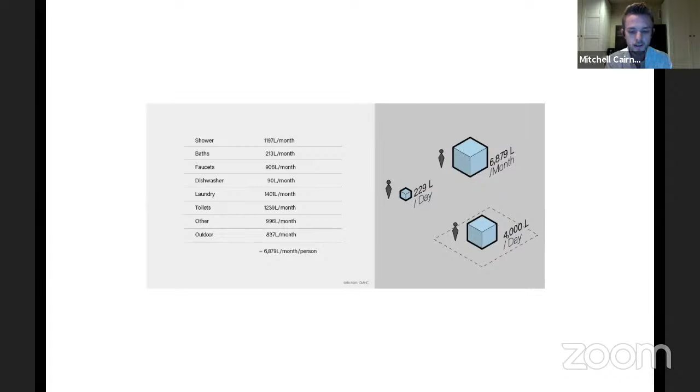Human demand of this resource, even in water-rich North America, can leave whole ecosystems with insufficient water, devastating plant and animal life. With all of this, and water's unique tangibility and tactility in comparison to electricity, it will be the resource of focus for this thesis moving forward. According to the CMHC, on average an individual Canadian consumes 6,879 liters of water per month.

If the building were to collect and provide its own water instead of relying on municipal water, it would greatly lessen the environmental impact of the water consumption.

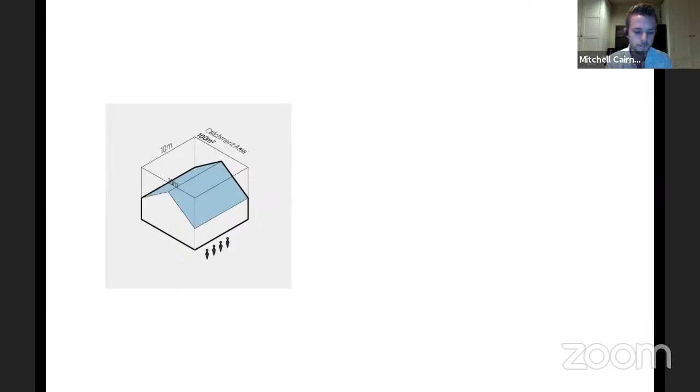How much water can realistically be collected by a home, though? This diagram depicts a typical size suburban home with a building footprint of 100 square meters. The charts on the right indicate how much water is collected by a roof of this size each month relative to the amount of water used by various fixtures. As you can see, the collected water is only enough for a single fixture each month, with some water left over in months of heavy rainfall.

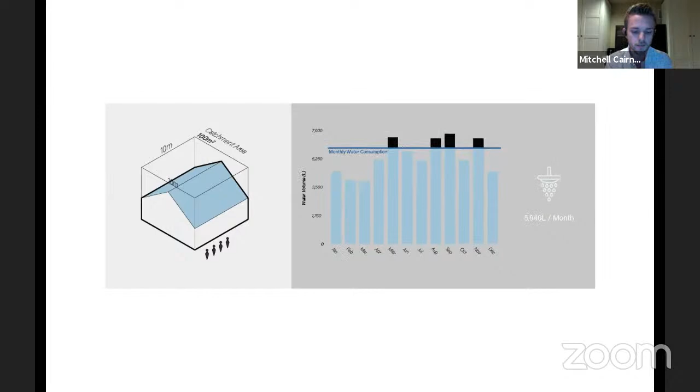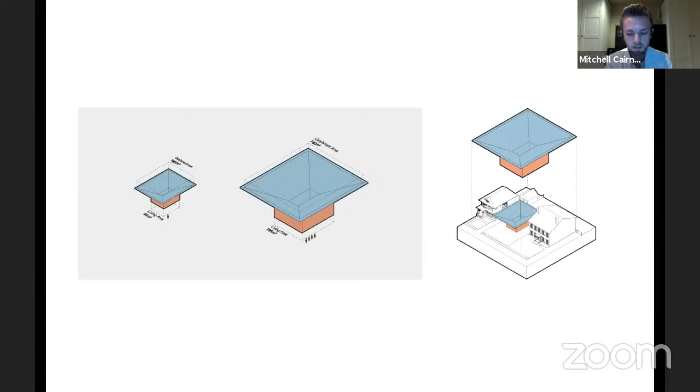This brings up the question of reasonable consumption. Instead of accommodating current consumption habits, are these habits even reasonable, and is it feasible for people to consume less water? Now that the problem has been defined, before attempting to answer that question, let's look at how buildings currently deal with issues of sustainability.

In my thesis, I've defined two main existing approaches to sustainable design. The first I call performance sustainability, which is a building that uses minimal resources through technological intervention. In terms of sustainable design, these types of buildings are generally unremarkable as their sustainable functionality is performed by systems often hidden from view or entirely disconnected from the overall design.

Design sustainability, on the other hand, is a building that embeds sustainable ideologies into its architectural design process. These buildings are more overt in their sustainability since this would have been a goal from the outset of the design process.

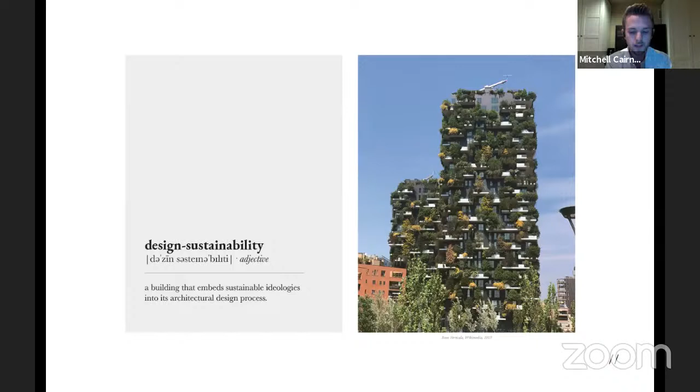Part 2, Sustainability in Humans. While passive design strategies and high-efficiency HVAC systems are effective strategies of reducing the environmental impact of buildings, the humans occupying those buildings often don't understand or care about these systems, and therefore don't understand or care about their role in contributing to the building's overall sustainability.

How then can architecture take the concept of sustainability, which often resides in a more technical realm, and bring it to the forefront of people's awareness?

Sustainable design PhD student Debra Lilley examined various methods that innovative products use to shape human behavior towards sustainable outcomes through their design. She created a simple framework which places products on a scale where one end is more passive and guides change, while the other is more aggressive and forces or ensures change. Her paper explored three concepts.

The first, called feedback, found in industrial design products such as the power aware cord, which visualizes energy consumption. The second, called behavior steering, is evidenced through the flower lamp, which provides incentive to use less energy and closes as more energy is used throughout the day. And finally is technological intervention, exemplified by the integrated sink plus toilet, which acts on the user's behalf regardless of their desire.

Using a washroom as a means to explore these ideas in a more architectural context, I developed a series of vignettes which attempt to consider how behavior might be shaped in this space towards the outcome of reduced water consumption. Through various modifications of this simple space, such as rendering it both physically and visually uncomfortable, visualizing wastewater, and requiring the occupant to pump their own water, it became clear that adapting Lilley's work to an architectural context was not enough on its own.

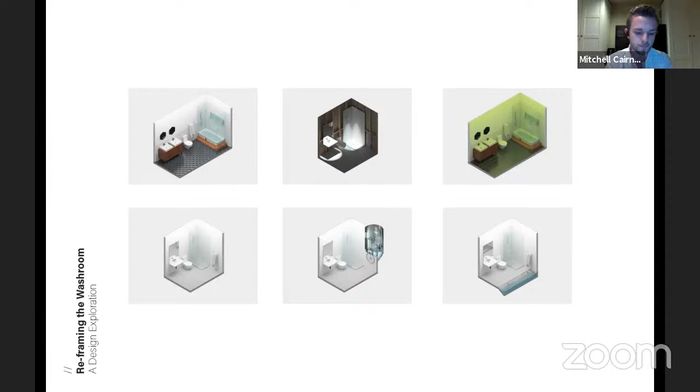Where the previous approach began from a psychology perspective, a second stage of design research explored existing architectural theory and considered how it might be applied in the context of this thesis.

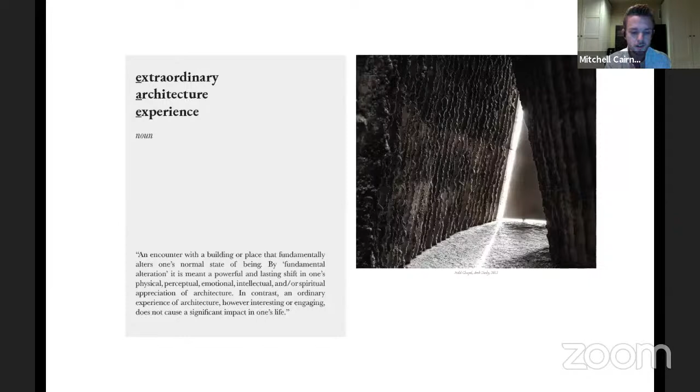In his book, Architecture, Culture, and Spirituality, Julio Bermudez presents the term extraordinary architecture experience, which is an encounter with a building or place that fundamentally alters one's normal state of being. By fundamental alteration, it is meant a powerful and lasting shift in one's physical, perceptual, emotional, intellectual, and/or spiritual appreciation of architecture. This text inspired a pavilion design which engages people in the most common

aspects of household water consumption, though it does so in very unconventional ways.

The anti-program of the pavilion allowed the design to explore beyond the confines of realism, pushing humans to an uncomfortable extreme. The main problem that the pavilion encounters is that one person would likely have a different experience and response to the building than another.

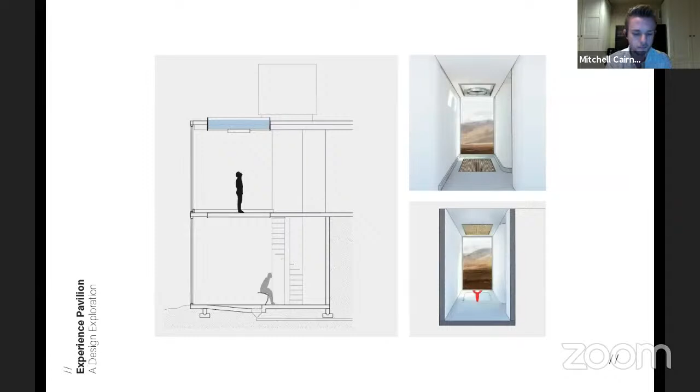Though the pavilion did not result in useful design elements, it ultimately points towards the variety of reactions individuals have towards architecture, and how this positions Bermudez's work as an interesting way of measuring experience, but not a tool for creating it. Part 3: Sustainability and Aesthetics.

I'll let this quote by Frank Lloyd Wright preface this part of the presentation: 'Even these buildings we live in, or for, are no longer thought-built. In fact, they never were. They were merely taste-built.' Aesthetics can be defined as a set of principles underlying and guiding the work of a particular artist or artistic movement.

Consider guides for design such as the Golden Ratio or even Corbusier's Modulor Man. These guides are used to arrive at a formally aesthetic, pleasing design outcome. This is obviously a very valid approach to design and plays a significant role in the architectural discourse.

However, it is a dangerous temptation in the context of sustainable design. Over the course of several design projects, I struggled to escape the process of designing from this perspective. It is important to briefly reflect on some of the work to understand the need to detach from such an approach to design.

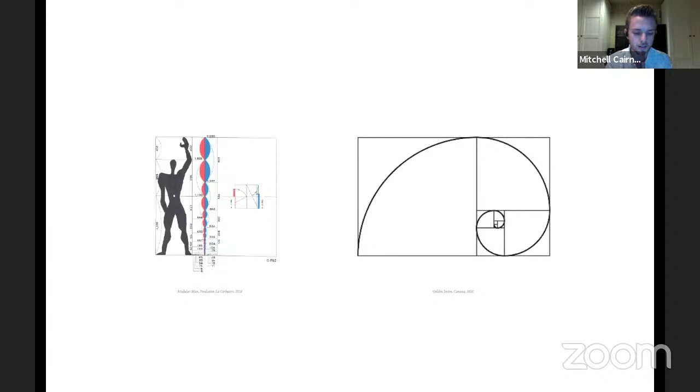The premise of the design for a consumption feedback neighborhood was to integrate publicly exposed water collection tanks into a home's design in an effort to reduce water consumption. The problem was baked into the project from the outset, as the driver for each design was not the water itself, but rather some external arbitrary aesthetic goal.

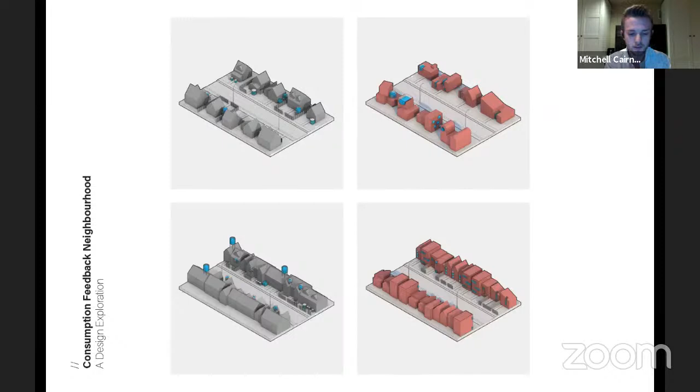In retrospect, these houses were designed with an aesthetic outcome determined prior to the design process. This is not to say every aspect of this project was flawed—many of the ideas developed in these houses persist into the latest design work. However, the most important lesson learned was how to escape the temptation of designing using aesthetics as the driver.

Aesthetics as an outcome. The conclusion that can be drawn from the previous design explorations, and much of the existing catalog of sustainable architecture, is that to arrive at the stated goals of this thesis, aesthetics should not be a starting point. Instead, it should be seen as an outcome of a sustainable design process that forgoes formal aesthetic considerations to the greatest extent possible.

In the book Aesthetics of Sustainable Architecture, author Glenn Hill describes a term called moral aesthetics, which defines a process of design whereby formal outcomes are dictated by sustainable considerations rather than aesthetic goals or principles.

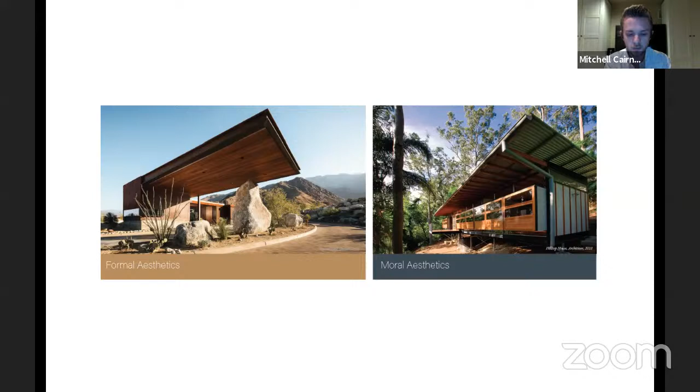For example, both of these buildings feature an overhang. However, the left overhang was designed with a desired formal outcome in mind, whereas the right overhang exists to provide a greater surface area for rainwater collection and to reduce solar gains within the building. The driver for this overhang is not a desired formal aesthetic, but rather considerations for a more sustainable building.

So far, this thesis has identified the problem related to sustainable design and water to be that humans generally consume too much of it within their home, and the architecture does nothing to guide or improve this behavior. It simply manages and mitigates.

A second problem is that the design of buildings themselves doesn't convey the importance of caring for water. In fact, they can convey the opposite—buildings are designed to have an exclusionary attitude towards water. Water in the context of humans generally relates to consumption, drinking, bathing, cooking, but buildings play a much more significant role when it comes to water.

They keep people dry. At its absolute bare state, a building is simply a shelter—walls and a roof to keep water out, among other things. But in doing so, it paints water in a negative light, a thing to be avoided.

To begin to address these issues through an architectural project, it was important to take a step back and approach the design process from the standpoint of water, and how not only the occupant, but also the building, are to engage with it.

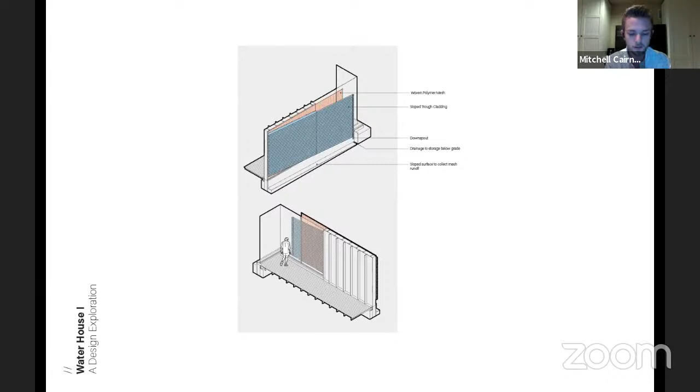The key element of this design is a central large 7,800-liter tank that stores the monthly amount of water a family of four can consume under the ideal water consumption model. The placement of this tank is meant to act as a clear and constant reminder of the occupant's consumption habits.

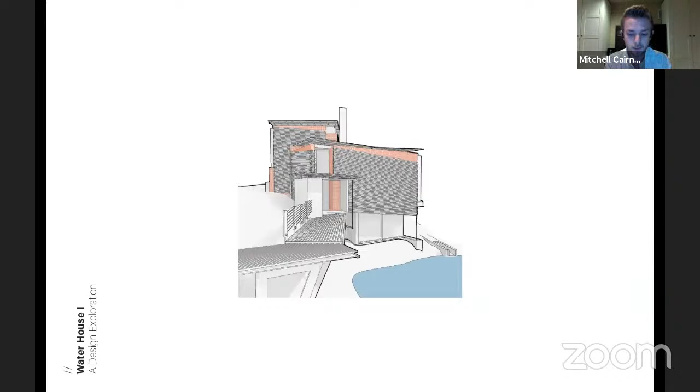These various design strategies draw from much of the previous research and begin to demonstrate how a building can engage with water from a new perspective, as well as how the concept of consumption feedback can manifest in an architectural project. Though this project does not describe a new model for sustainable design, it provides a starting point for new avenues of conceptualizing aspects of design and highlights the areas that need greater focus moving forward.

That brings us to the final design project. Moving on and learning from the previous residential exploration, this final design project was approached from a similar but more rigorous perspective. The previous design was located on a large site, which allowed for unlimited design exploration, whereas this project is located on a much more restrictive site. The smaller site changes the building's relationship with sustainability and water.

With the previous design, the building was sized based on the consumption model for a set number of individuals. The site itself had very little bearing on how much water could be consumed, as it was so large. In the case of a smaller site, it plays a much larger role in what is considered to be a sustainable amount of water, as less surface area means less space for the various components of the water management system.

Therefore, maximizing the extent of the site allows for a building that has a more concrete and clear relationship with sustainability. In other words, the previous design had an arbitrarily human-driven relationship with sustainability. This project has a site-driven relationship with it.

Municipal water infrastructure serves the site. However, unlike the neighboring houses, this lot will not be connected to those services, as it will be a self-contained water system, performing all of the tasks from water collection to treatment on site.

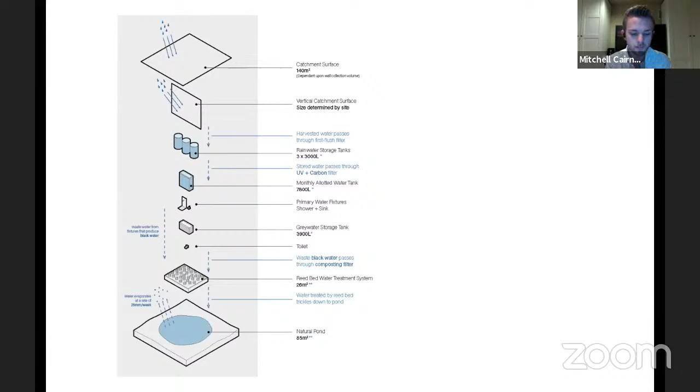As mentioned previously, vertical surfaces can collect water as well. This is due to wind-driven rain, which is quite common during rainstorms. The amount of water deposited depends greatly on the wall's orientation. The driving rain rose indicates the amount of water per year that will be deposited onto a building face.

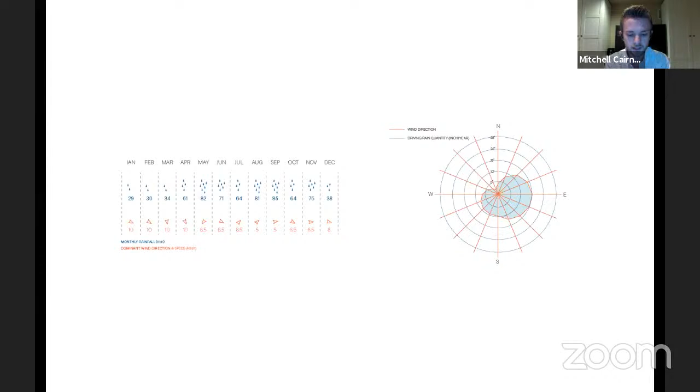This number is affected by several factors, such as surrounding urban density and wall height. Based on the orientation of the site, these diagrams illustrate the amount of water that will be deposited onto each wall. The leftmost diagram uses a wall that's orthogonal to the site, like any typical suburban house. Based on the site orientation, a fair amount of water will be deposited onto this wall. However, it can be further optimized.

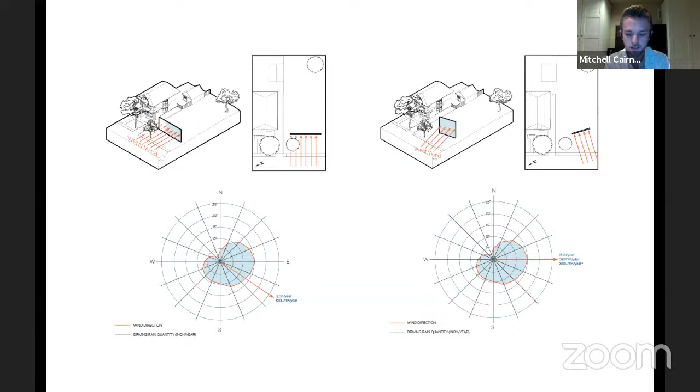The wall on the right faces due west to maximize wind-driven rain exposure. It also accounts for a tree at the front of the lot by becoming more narrow, but extending upwards, which allows it to take advantage of more wind exposure at greater heights.

Another iteration of the wall that was considered was a curved wall. Typically, concave surfaces introduce erratic wind patterns, which may or may not affect the amount of water impacting the wall surface. The equations used to calculate the wind-driven rain load on the previous walls cannot be used for curved walls, and as such, it will not be used moving forward.

With the wall's position defined, it can be used as a starting point to generate a building massing. The other constraint on the building massing is the catchment area. Earlier in this chapter, it was concluded that at least 140 square meters of catchment area will be required to accommodate the water consumption model.

Though, since sustainability in the context of this project is tied to the site, this number acts as a minimum rather than a limit. This diagram represents the massing process, which aimed to achieve a mass that accommodates both a minimum catchment surface as well as enough volume to provide a comfortable and expected living experience for a typical Toronto family.

The roof is perhaps the element most synonymous with water protection. In the case of a house which operates on collected rainwater, however, it serves a far more important purpose than shelter. Rainfall data provides a quantity of rain passing through a horizontal plane.

As already discussed, rain does not always fall in a perfect vertical line, as wind often adds a horizontal vector, causing it to fall at an incline. Abstractly, more rain will impact a surface incline towards the windward side, which matches the inclination of the falling rain. Yet the additional amount of rain may only be marginal, but it's worth addressing on principle alone.

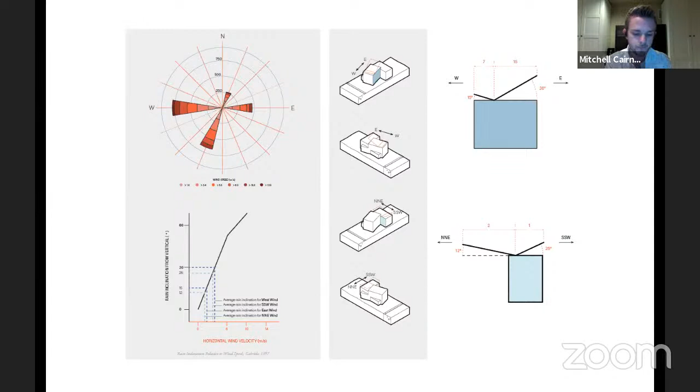On the left are various stages of massing development, which resulted in a sawtooth-style roof design. This is to reduce the overall height of the roof while maintaining the perpendicular angle towards the wind-driven rain.

The selected building massing employs a simple flat roof assembly and affixes the angled catchment surfaces atop a properly enclosed roof system. This is preferable to the alternative of allowing the roof system to follow the sawtooth catchment angles. Overly complex roof geometry is more difficult to construct and therefore more likely to fail.

A typical rain screen assembly is designed to engage with water, however, this engagement is defensive in nature. Instead, the profile of the cladding has been changed to resemble a gutter, providing a volume for water to collect and be transported into the home rather than away.

A simple extruded rectangular profile is insufficient for this task, as it would deflect a significant portion of wind-driven rain, and so a more effective profile was designed. The main component of this profile is the angled face, which matches the most frequent incline of west wind-driven rain, maximizing the exposure of the vertical plane compared to the rectangular profile.

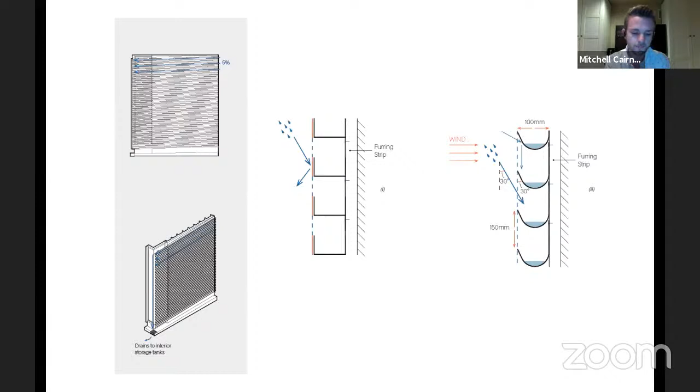Beyond the building itself, the site plays an important role in this design project. It is used to perform two necessary functions of completing the full cycle of water use: treatment and restitution.

Following the use of water in a toilet or other fixture that produces black water, the waste travels into a composting filter before entering the reed bed. Here, the water is passed through several gravel and plant roots, which cause a variety of physical, chemical, and biological interactions before it eventually exits the bed and travels into the evaporation pond.

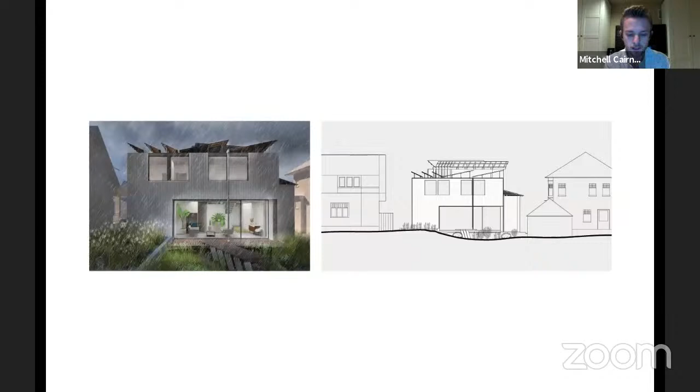Outside of direct human engagement, the site also has its own relationship with water. Typical grass lawns are not efficient at dealing with heavy rain loads, leading to significant runoff into municipal stormwater systems. To mitigate this, the site implements a rain garden, which is a depression into the site that's filled with various vegetation. The rain garden traps excess rainwater and slowly drains it back into the water table.

With all of this previous work, it's important not to lose sight of the actual use of water within the home, related to humans. Where the previous designs only employed one tank, this one uses two, one for freshwater and one for gray water. The relationship between these tanks and the fixtures that use them is important to clarifying the stages of exergy or water quality. Water that can do the most work is in the main tank, and gray water, which can only do low quality work, is in the adjacent tank.

This is further expressed by exposing the water traveling from the shower and sink into the gray water tank, clarifying this relationship. Two possible orientations for these tanks were explored. One was placing them vertically and the other horizontal. The issue with vertical placement is that it likewise suggests vertical placement of fixtures. It would be unreasonable to suggest that the occupant use the toilet on one level and have to walk up to the next to wash their hands. This leads to a horizontal placement, which allows for all of a washroom's fixtures to be situated on a single level, as well as allowing for multiple washrooms across both levels.

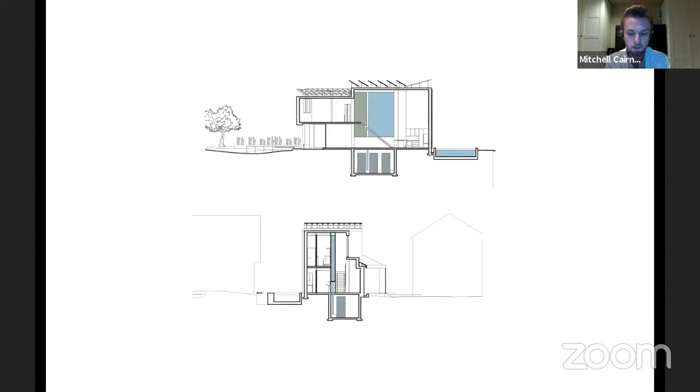To conclude, the primary question this thesis aimed to address was, how can architecture take the concept of sustainability, which often resides in a more technical realm, and bring it to the forefront of people's awareness? Approaching a sustainable building project from a typical architectural design perspective most often results in a disconnect between the sustainable design thinking and experience of the occupant. The alternative sustainable design process presented in this thesis steps outside of the conventional green design paradigm and begins to reframe the way architecture engages with surrounding natural systems, and likewise begins to reframe its occupants' understanding of the resources they interact with every day.

Most importantly, this thesis identified that while many of the innovations and advancements within sustainable design are greatly contributing to a better future, they're not the only tools to address environmental concerns. Through careful and thoughtful design, architecture can step beyond its current role and begin to provide humans with the understanding required to make meaningful changes to their relationship with resources. Thank you.

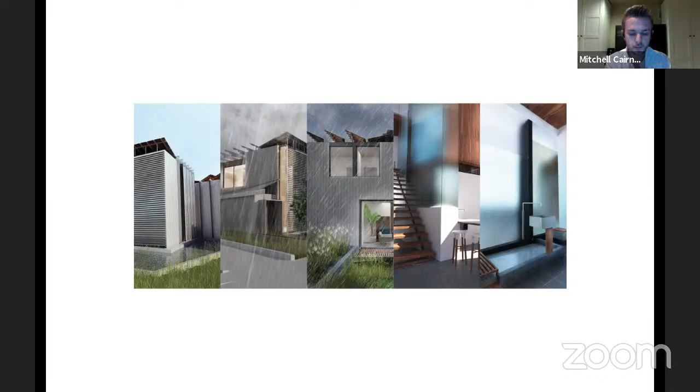Thank you, Mitchell. Paul, Vincent, the floor is yours, if you have any questions for Mitch regarding clarification of anything that he has presented.

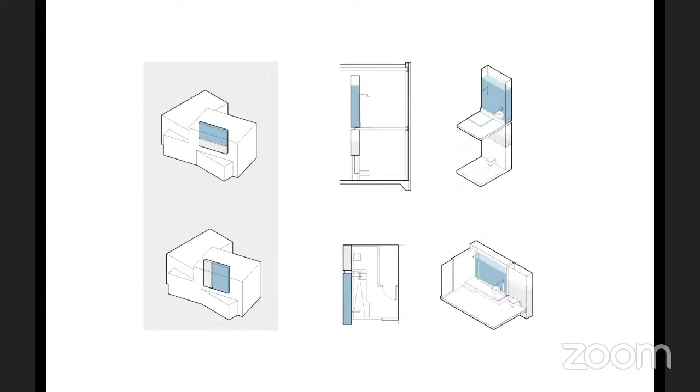I have one question. Did you make it? Did you generate enough water? Oh, in terms of the catchment area and the size of the house? Capture enough water, I should say. Yeah, sorry, perhaps I didn't clarify that enough. So originally, the first attempt at designing a house, which is this one here, that's when I generated this consumption model. So this on the left here, I don't know if you can see my cursor, but this is that model.

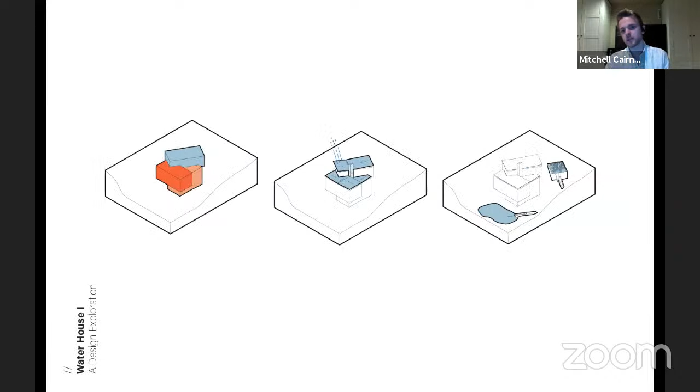So basically, yeah, you can collect enough for someone to use and live somewhat comfortably. Obviously, there's a lot of changes you'd have to make in terms of how much water you use. You'd have to be a lot more cognizant of it. But it is entirely possible to have an average sized house using that catchment surface to collect that water. So to answer your question, yes.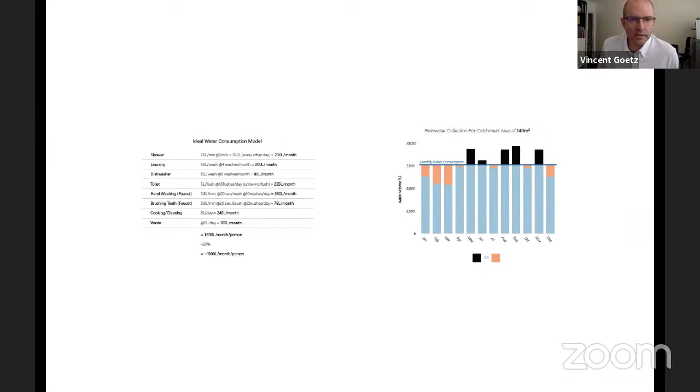I have a few more questions. Should I just start in on that? Or? Sure, Vincent, yeah. These are questions, of course, for clarification. Okay. Well, I think I'll just leave it at that then, and let Paul just ask questions about clarification, and then we can go into discussion after. Is that? That's the idea. Yes. Okay. Thanks, Vince.

Thanks, Mitchell. I actually don't really have any questions for clarifications. I thought that your framing of the solution was quite methodical and thorough. So I don't need any clarifications, but I do have a number of comments, but we'll wait for those. I think we can potentially go ahead with the comments unless Miliana, Mark, do you have any questions before we ask our guests to provide feedback and commentary? No, I'm good, thank you. We've been following Mitchell's work for the past year, so it's pretty clear to me. So yeah, we can start with the discussion. Yeah, me too. I'm happy to go ahead. Okay, so Paul, please take it away.

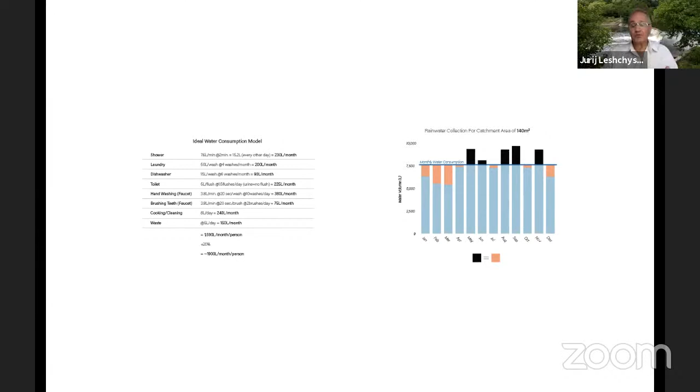Okay, terrific. Thanks, Jurij. So Mitchell, as I said, I think that your framing of the solution was a very good step-by-step development through it. I got what the solution was all about.

However, this is where the big however comes in. The feeling that I was left with when I got to the thesis was that your thesis was a solution searching for a problem. And I'll unpack that a bit for you because it sounds very blunt and direct.

So one of the overriding current concepts of sustainability in the realm of architecture: how can architects help to drive people towards sustainability? One of the biggest things that we can do is reduce the consumption of cubic meters of built space per person, just the cubic meterage that each person occupies.

And at the beginning of our discussion today, we were talking about the fact that I pay very expensive rent for an office that nobody has used since March, and nobody seems to want to use it either. So there's a consumption of cubic meters that we use that maybe we don't need to, and we can be more sustainable. So I got the sense that your project was certainly not in any way looking at the reduction of the cubic meters per person in your house.

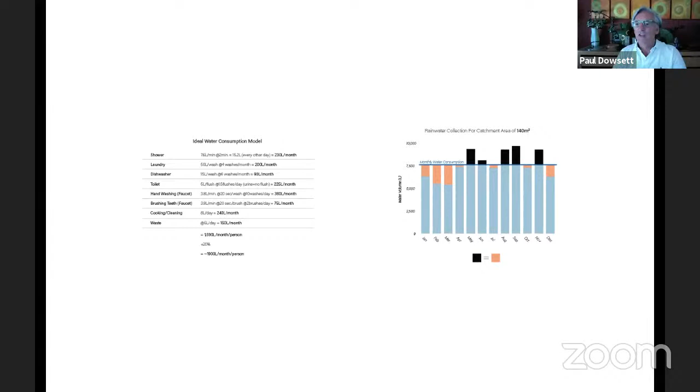The second question is, if what you've created is not an ideal solution for the City of Toronto, because we have such a robust, mostly natural system available to us, where would this solution be a solution for? Where in the world? And would they have necessarily the same rain and wind principles? What might you need to modify to apply this solution in a location in the world for which it would be appropriate? So, two very long-winded questions. Sorry, Mitchell.

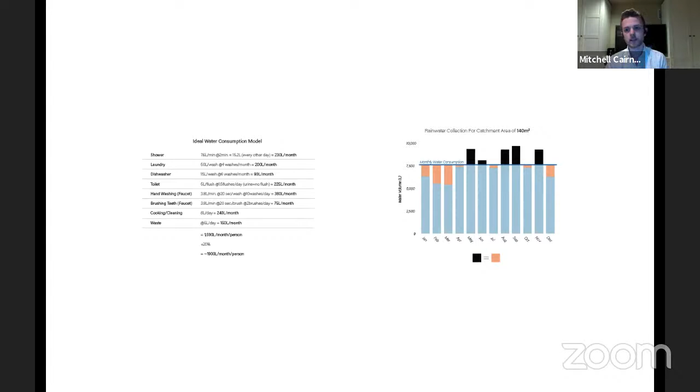Okay, well, great. Thanks for the questions. So to answer your first one, I guess I kind of have a two-part answer. If you want to accept that obviously our water system here is great, as you mentioned, and you don't want to consider using site-collected rainwater, which I'll get to in a second, you could completely forego that, I suppose, and use the internal feedback system of these exposed water tanks in a similar fashion.

I actually did have some earlier projects that I haven't included here, but I did exactly that. Rainwater came in halfway through my thesis, and I was using municipal water and just looking at the human element operating inside of the building. But I'll explain why I went so far as to completely cut out the municipal water connection. And the point for that was really just to push the concept of using architecture as a design medium to frame the importance of this particular resource.

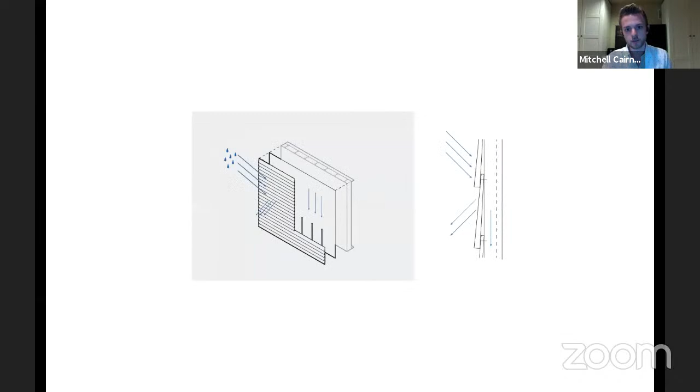So I think if I go to this little sketch I did ages ago, and maybe imagine this in a larger context where you don't see the treatment happening at the plant. You don't see the treatment. You don't see all of these larger processes.

And I think if that's located, if that's yours and you own it and you have to care for it, it becomes something that you care about more. So I think in that way, aside from the sustainable considerations, just in terms of how it changes people's perception of resources and how they care about those resources, that's sort of the motivation for designing it the way I did. And to answer your second question,

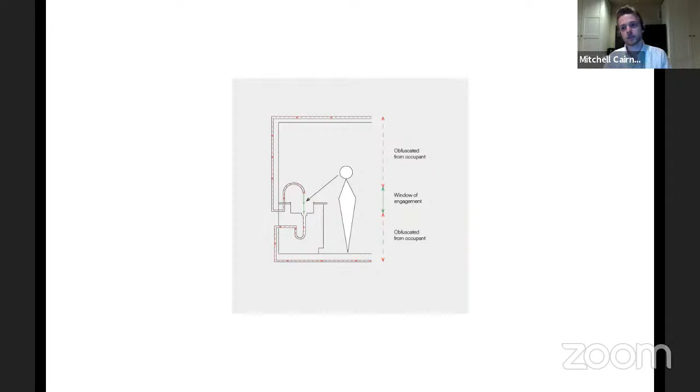I established early on that I was going to focus primarily on Toronto and our region here, just because when you're dealing with things like meteorological data and these sorts of things, it's very difficult to create a universal design. And actually, I'd say that the final design outcome I have is certainly not universal, even relative to its neighbors. Like if you were to build this across the street, it would look entirely different.

If you look at the rain data, obviously this catchment wall would be located at the back of your property if you're across the street, right? Certain things like that, the entire design would look different. So I think you could probably take the concepts and adapt them to another site elsewhere in the world, but I think the principles would apply, but obviously the design outcomes would be entirely different.

I'm not familiar enough with certain climates. Like obviously in a drier climate, that wouldn't work at all. You could certainly use the feedback systems that I developed for the interior and trying to express the water quality and the difference between freshwater and gray water and appreciating it and that sort of thing.

So I think ultimately this isn't a model that you replicate. Like I said, even in the same neighborhood, you wouldn't replicate this everywhere. It's just the approach to the design that I intended to be something that could be used elsewhere. I hope that answers your questions.

Mm-hmm. Yep. Thanks, Mitchell.

Vincent? I'm interested as to why you chose a house as the model and not, say, for example, a suburban industrial building that has a huge roof and potentially lower demand, and doesn't have easy access to the infrastructure that you have in an urban setting.

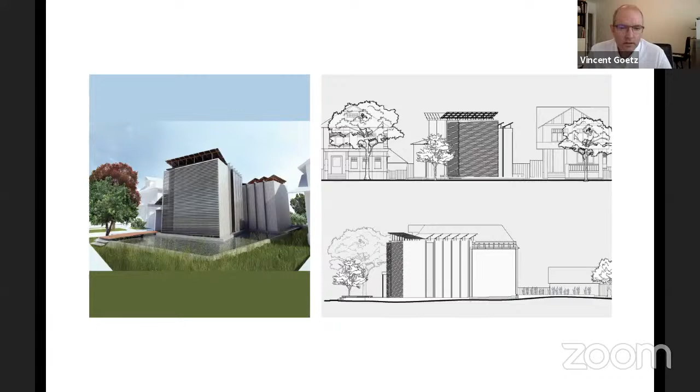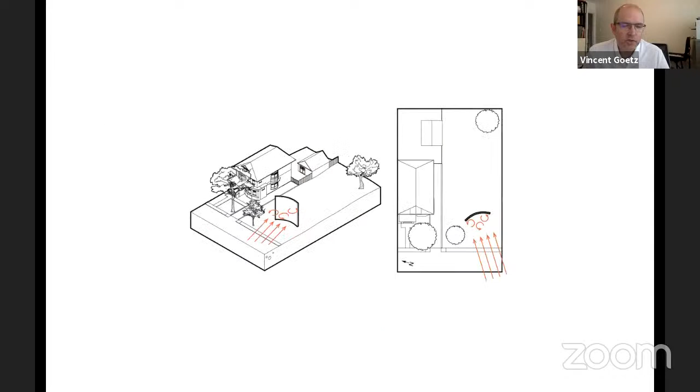The collection system for the roof, you had an interesting diagram where you had sort of a sawtooth structure versus the clip-on catchment. Yes. I was intrigued by the sawtooth and thought that maybe moves such as that could be seen as integral to the building. It could even be almost a structural solution to the building. It could also be the daylighting solution. It could be a whole number of things. So I'm interested as to why you went that route.

And by going the route of the sort of clip-on, could you have maybe made more out of that? Could it have been PV panels that are also generating electricity, but also catching the water, but also providing shading, but also,

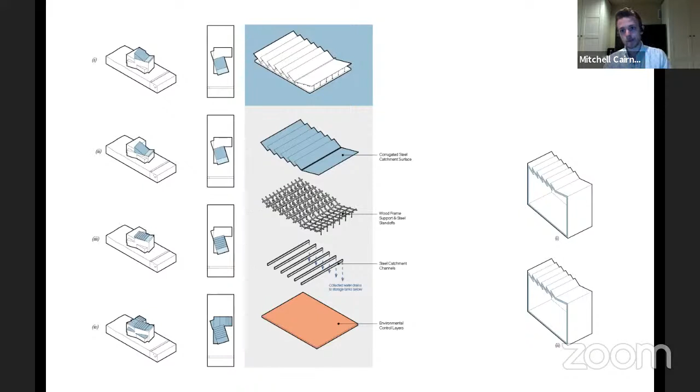And then just one last comment here: you mentioned that this is a solution for this site only, and across the street it would be different. But the slide you have up right now is almost like a kit of parts that could be applied to a variety of types of buildings.

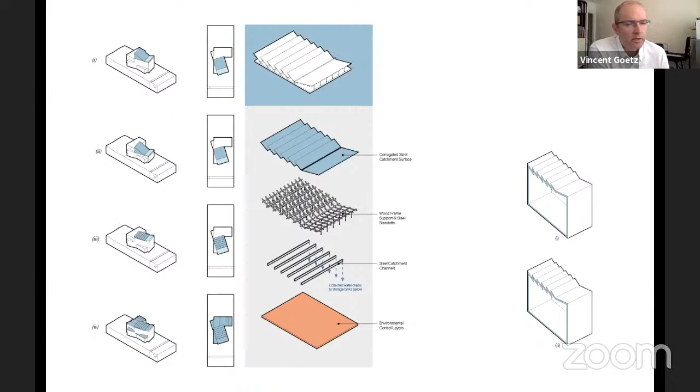So in some ways it is, sure, it could be a solution. You invented a cladding system to catch water, and you've got the roof system. But the plans of the house, I mean, you could lay out however you want, really. The pieces here are really the roof, the cladding, and the visible storage, right?

Yes. So in general, the layout doesn't really matter. You could quite simply not even have the bedrooms or the kitchen or dining room, and it could just be a space that you populate however you wish, and scale it up or down however you wish.

Yeah, so there's two parts to that, I'll try to answer both. The first thing is, when I said it's not a solution for all sites, I just meant that the formal outcome of this particular building—you can take the rule book I created to design this and apply it to any other house in this neighborhood—I just meant that the actual outcome wouldn't look similar to this in terms of the formal design.

But yes, I totally agree about the auxiliary spaces like the bedrooms and living room. I addressed this in my thesis but didn't have time to include it in the presentation. That's the one area where you need to make a concession in terms of formal aesthetic design, because a living room can't really be driven by water as a resource—it's not a space you engage with that in any meaningful way. So those spaces are auxiliary to the central component of the main water fixture, tank, and roof.

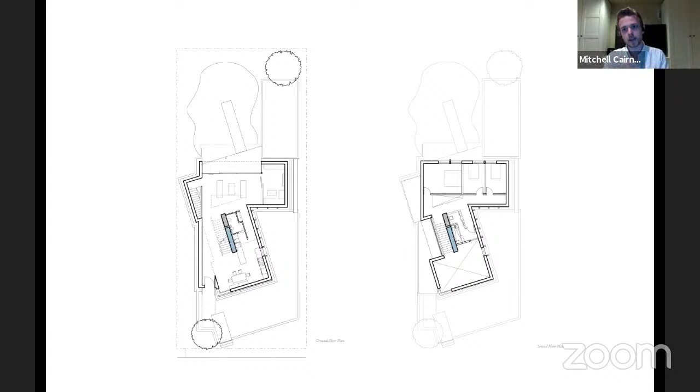Okay. Marco, did you have any comments? Nothing that hasn't already been talked about.

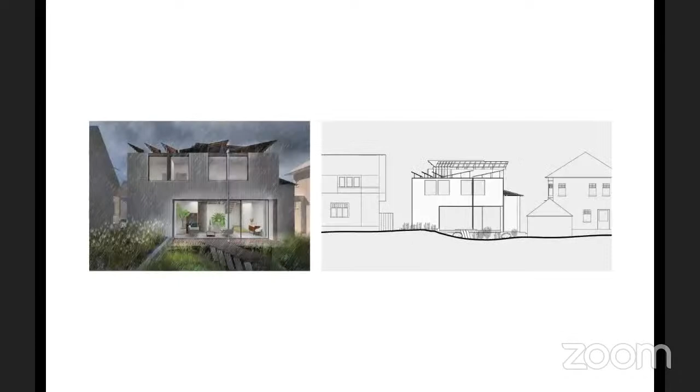We've been following the project for quite some time, so a lot of the stuff we're seeing today we have talked about at various stages. I think Paul's point about isolating this question of sustainability to just the one element of water—obviously that was a strategy to focus the project, but the question is a much bigger one than that.

The issue of Toronto's water system is an interesting one as well. There's this idea that it's in some ways a solution looking for a problem, but that's not really the driving ambition here, as I understand it. It's more of a speculative and experimental look at how we can make certain systems more legible and therefore potentially more influential on behavior. I think in that sense, it's an effort in that direction for sure.

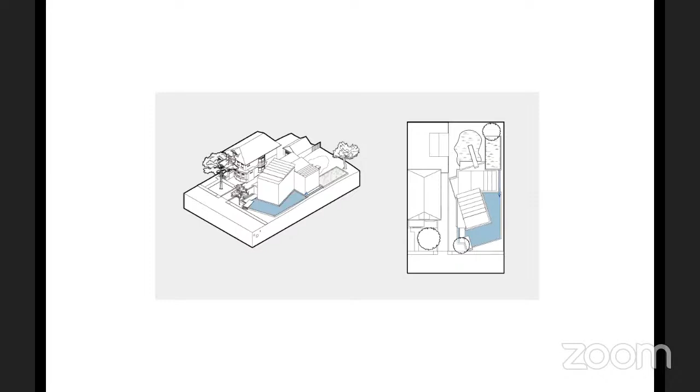But yeah, I don't have anything much more to add to the discussion. Okay, thanks, thanks Marco. Miliana or Mark? I have a couple of things just to say.

I think one thing, which Marco just touched on, is this idea that the thesis is not about a whole bunch of water saving technologies. It's about how people will respond to the design of the building in a way that will save water.

So I wanted to ask, could you talk a little bit about how you think people will respond—separating different groups of people, because there are the people using the building, and then there are people who may observe it from the outside. Are you addressing both groups? I presume you're addressing those using the building because of all the different systems.

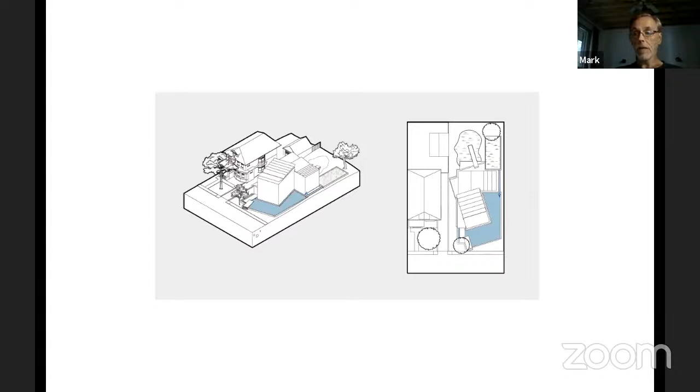But the people from outside, do you expect them to learn something from the building by observing it from outside? Will the neighbors learn something of the building without actually going into it?

Well, that's something I struggled with throughout the process: what is the extent of architecture as a tool for communication, and perhaps even education? Aside from putting up a big sign saying this is how this works, I think the point was to push it to the greatest extent possible in terms of what this building can do to represent an idea.

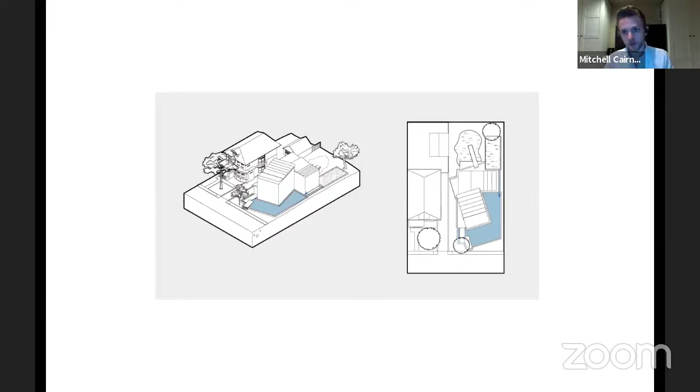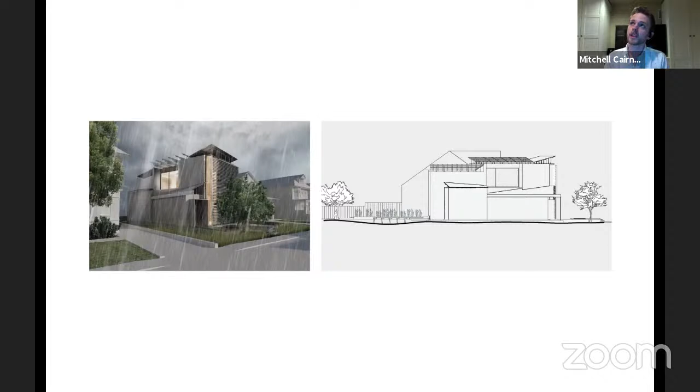So it's not just a representation. I think the idea of having this cladding at the front of the house shaped like these gutters might make people question why it's like that. It's this idea of framing the design of the building to change the way it frames its relationship with water.

There's other things I didn't necessarily discuss at length, but I did mention in the document, like the way the roof drains down the side — there's these metal chains embedded in steel housings that can rattle back and forth as the rain drips down. Things like that to kind of draw attention to how the house is operating.

It's one of those things where unless you actually build it, test it, and ask what people think, it's really impossible to answer that question. But what I tried to do was express all of this functionality and make it, as Marco said, as legible as possible, compared to a typical sustainable design that might do these things but masks it.

So you were endeavoring to make these processes, flows, and cycles explicit. As explicit as I could within the context of this site and this program, yeah.

Through that explicitness, people can potentially become aware of the implications of their water usage. Yes, and to answer the question further, I think it would be great if people walking by could gain some appreciation from it, but ultimately it's intended for the people who live there, so they can develop a greater appreciation of it.

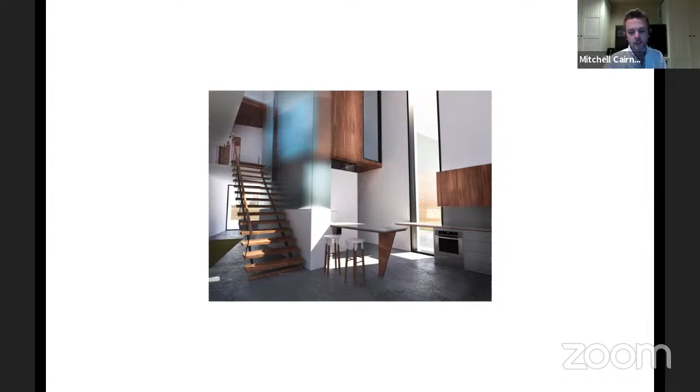Certainly. In terms of volume, one of the main attempts with this, and the reason I didn't go smaller, was that I think a lot of people aren't really willing to make concessions in the way they live. So the attempt here was to make a house that affords you the same space you're used to, and the same quality of life, but using less water. Because the house is the same size as its neighbors, if you redid your roof so you could use it as a catchment surface, you could use a lot of these features. In terms of integrating the tank on the interior, it would require a pretty significant renovation, but you could do something like that as well. This house is designed to be very similar in scale to its neighboring properties, so all the site features could certainly be integrated as well.

Okay, I'll leave it there. Thanks. All right, I think we will have to wrap it up at that point. We need some time for deliberation.

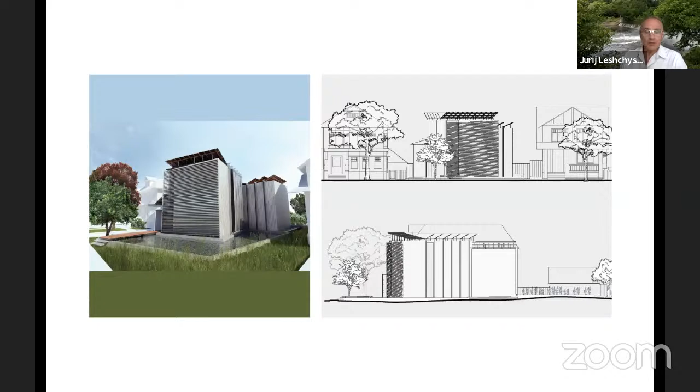So I don't have to say anything? You could, Miliana, I thought you did not want to say anything. Oh, no, I just didn't get a chance to say anything. No, it's fine. Please, go ahead. No, I just want, as I said, I'm familiar with the project, and I don't have much, it's more kind of a comment.

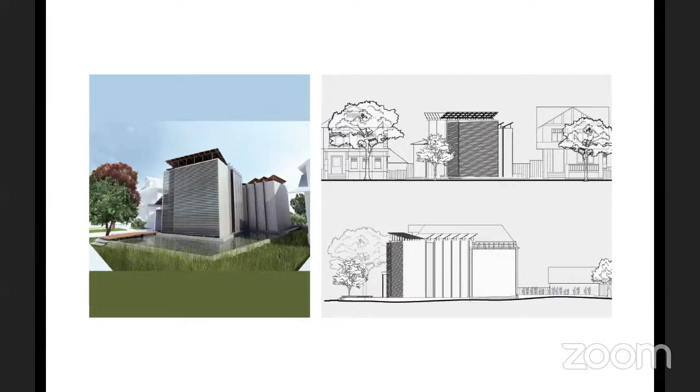On this journey, and to reflect on Paul's and Vincent's comments, and Mitchell's response also, I think the beauty of this is that we're not going to have a solution that fits all sites, which would lead towards cookie cutter solutions that are not very inspiring or good. One of the things Mitchell worked out here is a process and sets of parameters that one can follow, and even if you were designing a project at the opposite side of the street, following the same process, you would come up with a different solution. I think that's the beauty of it, because it allows for richness and different expressions in design while achieving similar results. And maybe that applies not just to the site across the street, but what happens if we are designing for Arizona or somewhere else. But that would be my final comment.

A short question, Mitchell—we are short on time. When you went through the whole process, and I know it was frustrating at points, looking for a way to go and a direction to take, now that you look back, are there any things you would do differently? Of course, to be smart in the end, right? But hindsight's 20/20. I think I'm glad I had those frustrations, because I don't think I would have gotten where I did with it. Making the missteps I did with some of the earlier design attempts, I think I developed a much richer concept at the end because of it. So honestly, if I redid it, I'd do it entirely differently, but I'm glad I had that frustration, because it led to a stronger conclusion at the end.

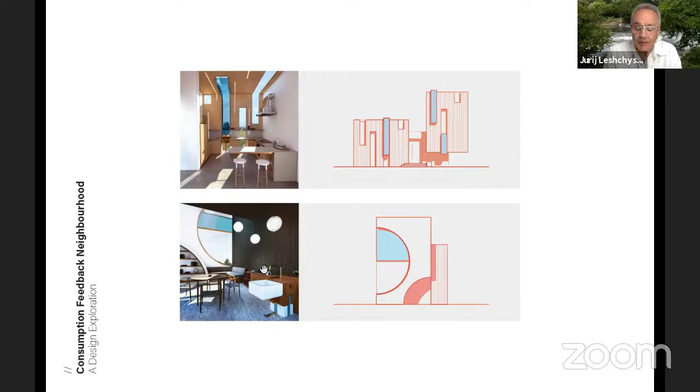Do you want me to leave, or do you want to put me in a waiting room? How does it normally work? I think you leave, if I'm not mistaken. Yeah, I think it's better to leave, because we'll have to start another meeting for the next presentation, and if ours is running in the wait room, we can't start the next one. So if you could leave, that would be better. Yeah, Mitchell, don't go too far, I'll contact you to catch up for another one.